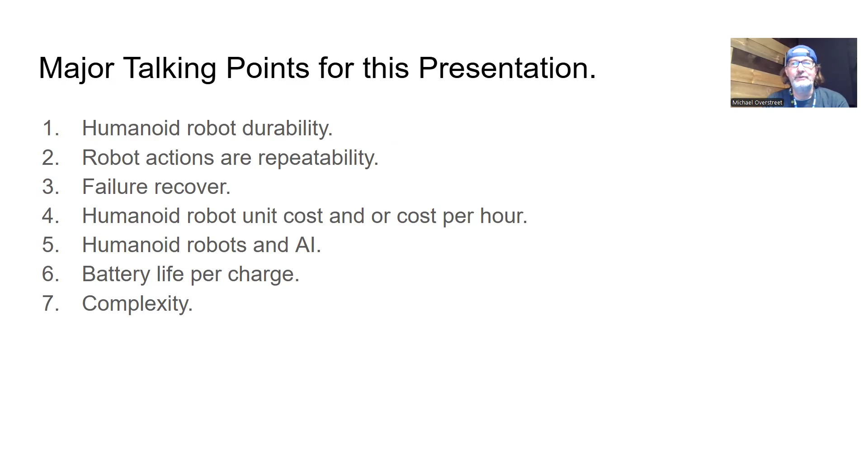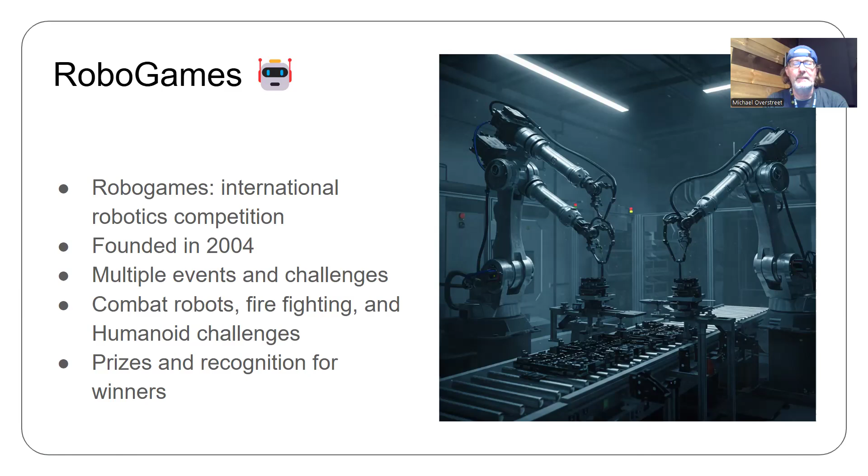So RoboGames is where I got started, like I said. I think my first competition was 2005 - I don't think I was there the first year - but it was a robot competition in the Bay Area. People from all over the world were there.

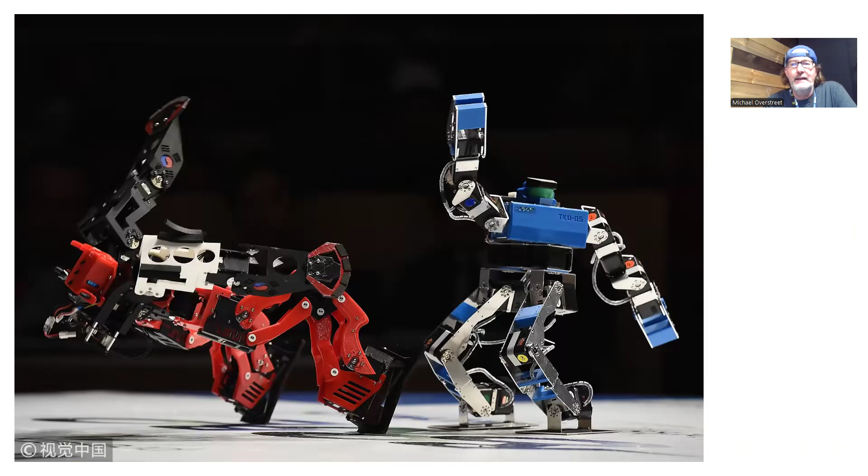So when people think about RoboGames, they usually think about BattleBots, the big BattleBot arena - oh yeah, yeah, and of course they've got BattleBots in Vegas and so on. So when people think about robot competitions, this is what they usually think about. Now, this is what I think about - this is a kung fu match between two humanoid robots. This is what I enjoy, this is what I think is very cool. This is what I did in RoboGames for all those years since 2005.

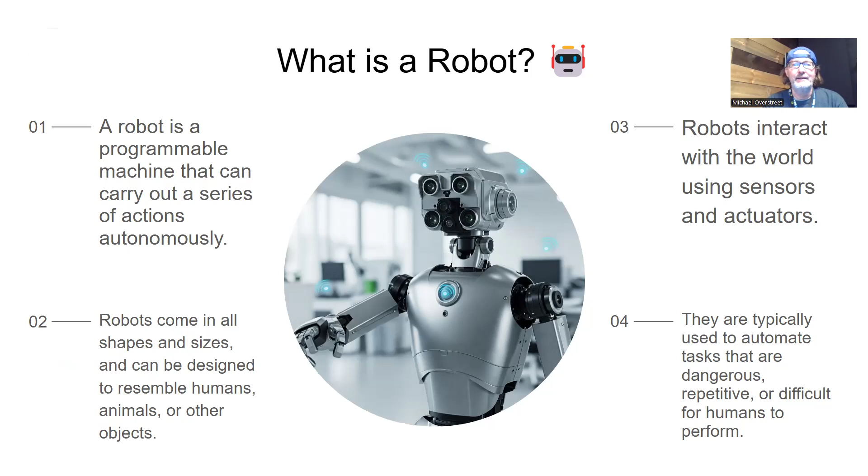Some of these slides are generic and AI created, but a robot is basically almost anything that is autonomous that you can program. Almost anything in the world now is a robot because almost everything we use nowadays has some kind of computer brain in it, and we tell it to do something, and then we expect it to do it. So the concept of what a robot is, is very generic. It can almost be anything.

Humanoid robots are trying to mimic us, and this has been going on for hundreds, if not thousands, of years. I think the Chinese had robots and the Japanese had tea robots that would serve tea to people. They had gears and pulleys made out of wood that would move the robot around and perform a pre-programmed action. But the big thing is they're trying to mimic us.

So when I tell this story, a lot of people don't quite get it. But when I was a young kid, I watched a rerun of Forbidden Planet. In Forbidden Planet, you never see the aliens, you only see their instruments, their doorways, the buildings they made for themselves underground. The cool thing about it is it lets your imagination go wild. You saw that kind of not a rectangular doorway like our doorways - kind of a triangle, squatted triangle, square, not even a square doorway.

The reason why that was so fascinating to me is because the reason I'm so interested in humanoid robots is because our environment is set up for us - two legs, two arms, our general shape. Humanoid robots give you the capacity or capability to not change our environment to suit the robots.

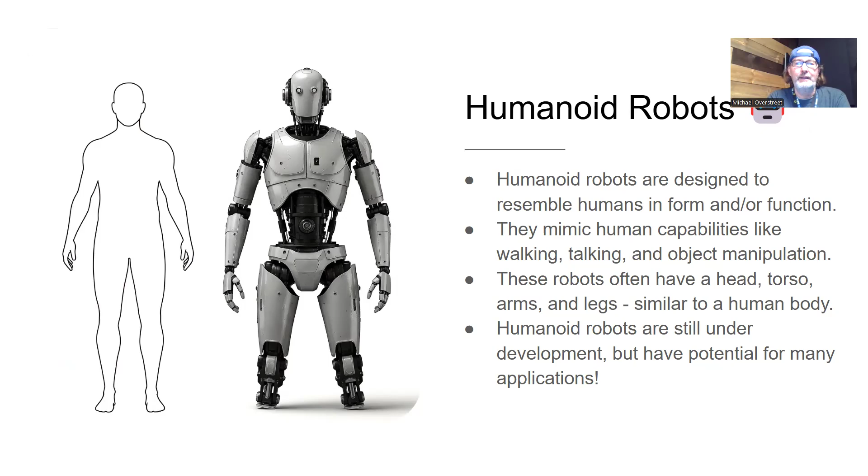That's all this slide's about, really.

One of the interesting things I always had conversations about at RoboGames was: why a humanoid robot? A lot of people have a really valid argument that function creates your form. Humanoid robots is basically form over function - not a humanoid is not perfect for all stuff. We have horses and other animals that we use on the farm and other places to help us do stuff, and their form works better there. But we also design the environment around them, or the tools around them, for use. So that interesting debate I always have with people usually goes: is form more important than function, or does function end up creating the form, the ideal perfect form?

I still don't think that debate is over, and I don't think it ever will be. I don't think a humanoid robot is the end all be all, but I'm also a big proponent and a big advocate of humanoid robots.

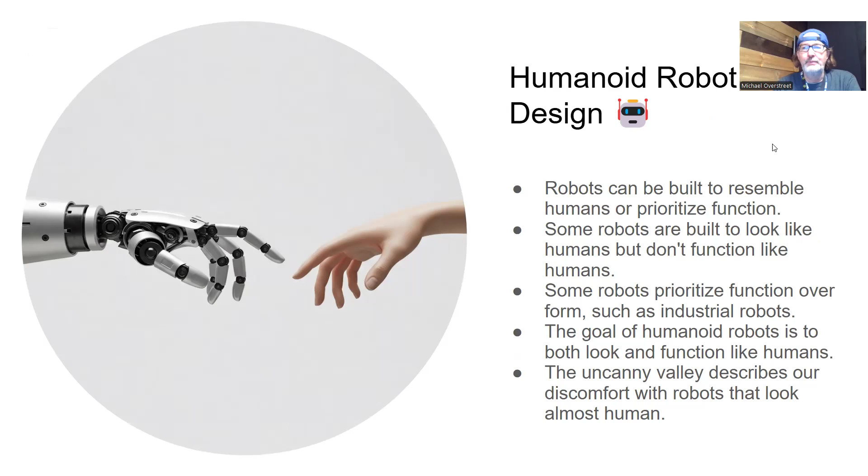And should they look just like us? I don't know. Maybe in some situations they should look just like us. In other situations, maybe they should look like a really powerful gorilla, or a really boxy robot. I'm not really set on the form like some people are.

It doesn't have to be a humanoid robot. You can be flexible in your design approach.

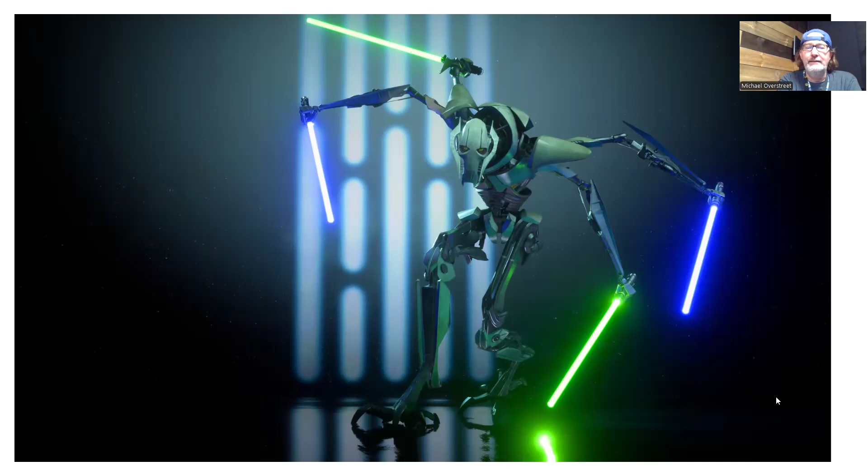Now, I love this picture. A lot of people may know who this is, but I don't think you need to be stuck on two arms and two hands. There's a lot of advantages to having three arms and three hands, or even four arms and four hands. Don't get stuck on it having to be exactly like us. Maybe we can find a middle ground from that form over function or function over form debate. This is all this picture is about.

I've seen robot arms that you can attach to yourself that could hold things for you - more powerful than your arms, helping you hold and carry things. You can attach them to your waist or shoulders and use them to pick up heavy weights, kind of like an exosuit or exoskeleton. We don't have to get into exosuits and exoskeletons in this talk, but I think they're a very viable way to make us - not like robots - but able to do a lot of the functions that a robot can do.

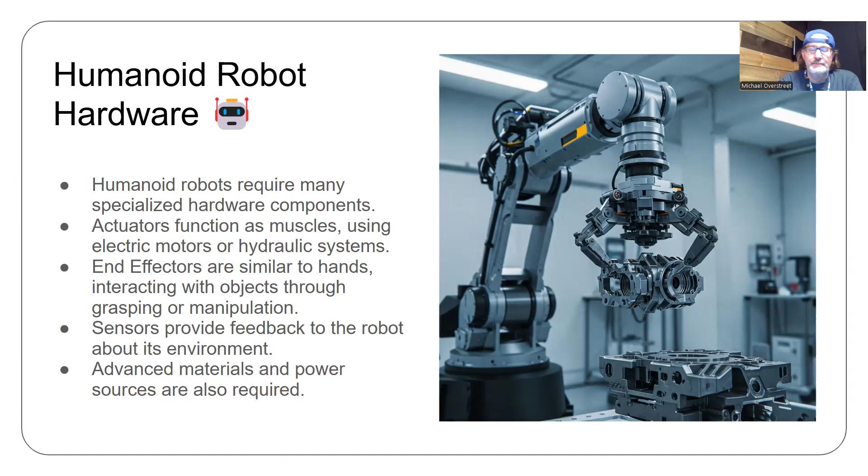Let me tell a story - this is kind of a myth, a legend, now that I've talked about actuators and servos. This is the legend of hobby robots that I've learned over the years. Back in the early 2000s, 2001-2002, in Japan, there was a Honda robot called Asimo - a very expensive, high-end robot, hard to manufacture and build.

There were hobbyists in Japan - of course the culture leans toward liking robots a lot better than American culture, which was brought up on Terminators. In Japan, a lot of robots are heroes. So some hobbyists were like, I want to build an Asimo.

Coincidentally, around the same time, Kondo, a servo actuator company in Japan that made RC hobby servos, came out with really high-end, expensive, high-torque, steel-geared servos. People saw that and started buying 15 or 20 of these to try to build their own humanoid robots. Kondo was shocked and surprised - they thought hobbyists would buy one to use on a helicopter or airplane, to move the ailerons, blades, and other parts on an airplane.

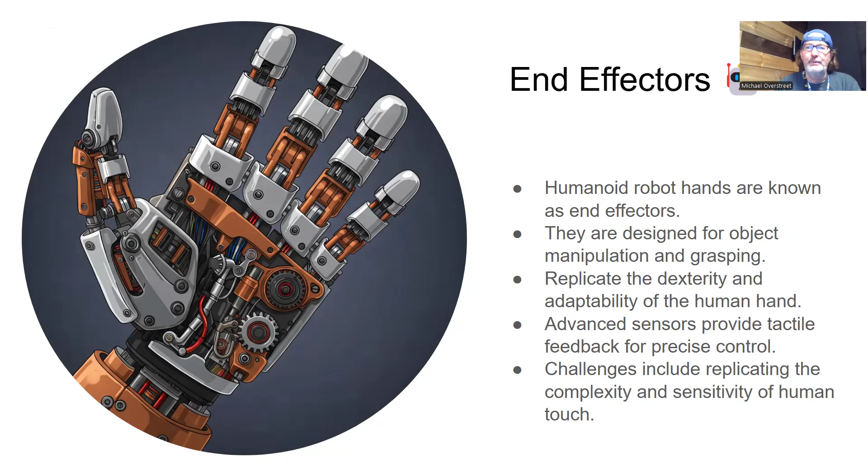When I talk about humanoid robots, I always like adding 3D printing because I'm known for that in the past, using some of the early DIY 3D printers to create robot parts, and I still do that today. It's a quick, fast and easy way to create something from your imagination, get it working and using it, so you can quickly iterate. I'm a big fan of iteration: design something, use it, figure out what's wrong with it, quickly iterate, create a new one. 3D printing is a great way for this iteration. May not be the greatest for mass production, but for innovation and creative iteration, I think it's awesome.

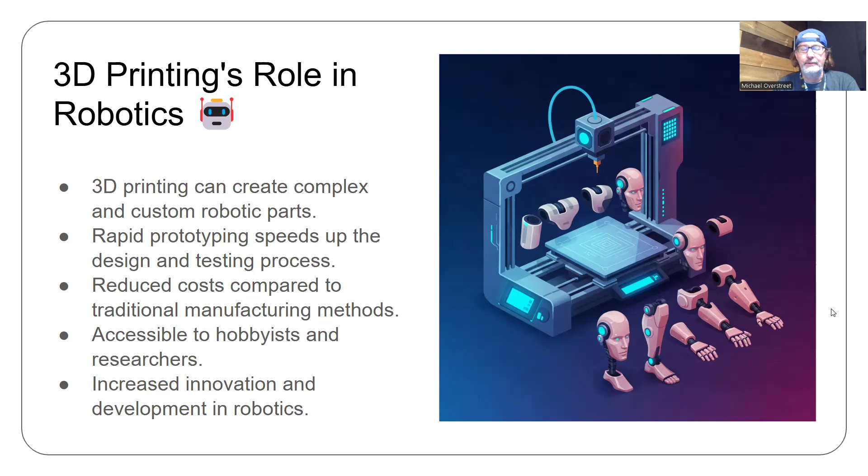With DIY 3D printers - well, not even really DIY anymore - the Cupcake's been around since like 2009, 2010. When I first used a Cupcake it was pretty much useless. Now most 3D printers are really, really good. You hardly have to do anything, you just print the thing out and you're done.

So this is one of the things I want to highlight. Right now, I don't think the battery technology is there. Most of the information I'm hearing is about 6 hours for a human-sized humanoid robot on a battery charge. And usually what happens is you get near the end of the battery charge and things start not working quite right - your sensors don't work quite right, they're not going to have power, it doesn't have enough lifting power and so on.

So I still think there's a lot of work needed here, especially if you're thinking a humanoid robot is going to replace a human, because most humans can work 6, 7, 8 hours a day easily, or that's kind of conditioned for us to work there. If you want a humanoid robot to do double and triple shifts, work 24/7, how are you going to do that with existing battery technology? I don't have a solution to it. I'm just saying that's something that needs to be thought about, because not only does it have to have enough battery life...

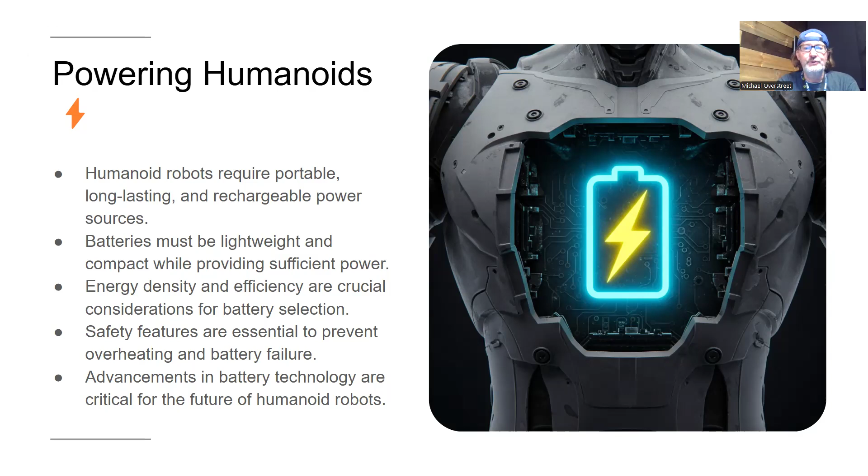...enough kilowatt hours, it can't be too heavy. If you've got a heavy battery and your whole chassis is designed just to carry that battery around, how can it effectively carry anything else? You overtax the servos and actuators because you have a huge battery, because you want an 18, 20 hour battery life, and that huge battery takes up all the space inside the humanoid robot.

Okay, so this is a huge topic - I probably could talk about it for hours. But the reason why I think robots and humanoid robots are becoming talked about more and more is the capability to train the AI in the humanoid robot to do tasks that are beneficial, that are worth paying money for. This area is so complex and changes so much on a daily basis. I still think we're years out before this is going to be, not even a solved problem, but just a partially solved problem. And AGI, artificial general intelligence - I don't know if we need that to make humanoid robots effective.

But there's a lot of work. To train a robot nowadays through videos or teleoperation, you've got to basically train it on one task at a time. And there are millions of tasks that we do every day that we don't have to be trained on one at a time. We can learn parts of a task and then use our brains to put all these little subtasks together to complete a major task.

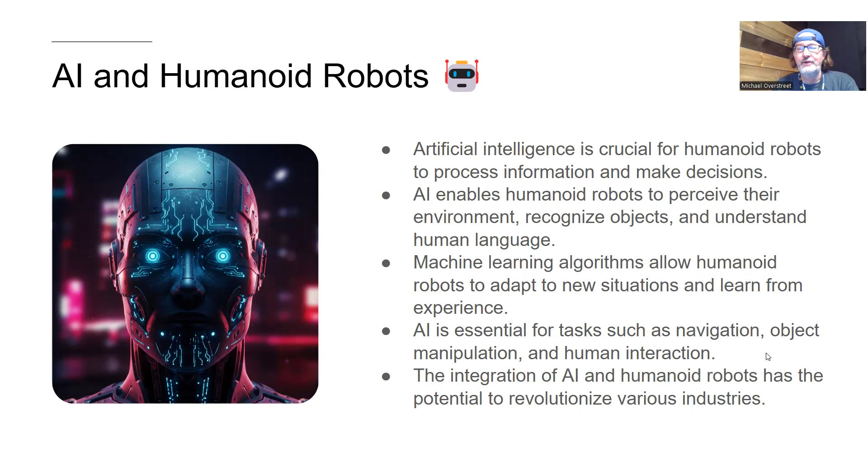Token creation, token generation - I just don't think that's... I mean, it's a way to learn and it's a way to create AI, but it's not really how we think, work, function, combine tasks together, and so on. It's a very complicated, very complex topic. I could probably spend hours talking about this topic.

But yeah, this is more reinforcement of AI algorithms, AI learning, machine learning, reinforcement learning, supervised, unsupervised, deep learning - all these complex things that are AI. And again, I reiterate, I've seen AI hallucinate.

I don't want an AI to hallucinate when it's picking up my cat. I don't want an AI to hallucinate when it's picking up somebody's baby or somebody's kid and accidentally hurt the pet or the baby or the kid or something. So we still have to solve a lot of these problems.

This is a term I've been hearing a lot lately, which is basically physical AI - the concept, as I understand it, is AI can only become artificial general intelligence if it has a body or form to move around and interact with its environment. Kind of like us - we become smarter as we move around and interact with our environment. We talk to our environment, we pick things up, we move in, learn, and so on.

As far as I know, AI is basically trained on data. You don't basically have a robot walking around learning stuff. You use teleoperation, you use lots of videos, and then you try to train the AI, which then after you train the AI can manipulate the robot to do what it's supposed to do based on what is seen in the video or the motions it's captured by teleoperation of the robot.

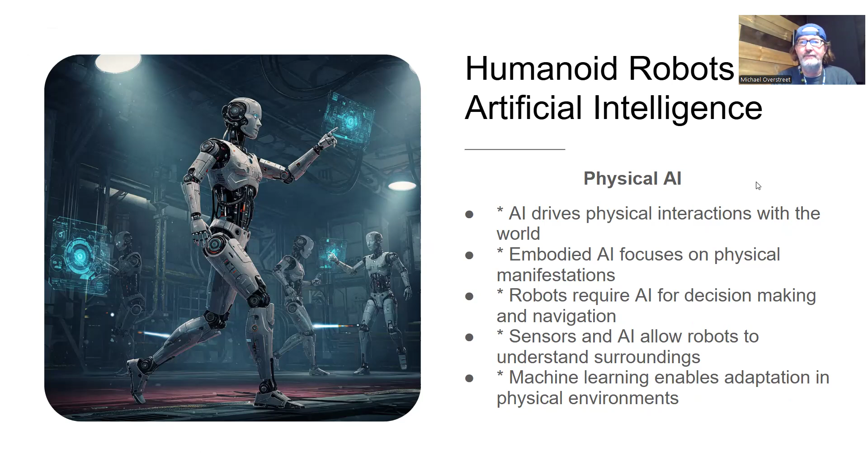Okay, again, I'm not an expert. I'm just bringing up interesting things that I've heard about or seen or have talked about.

So this is not investment advice. I'm just saying there are so many companies right now working on humanoid robots, which to me is awesome because when I first started at RoboGames back in 2005, everybody thought humanoid robots were a stupid idea. Now everybody's talking about humanoid robots.

The big thing is, I think everybody needs to remember that without all the work done by Boston Dynamics on their Atlas and Spot robots, and Honda's millions and millions of dollars spent on Asimo, these robot companies today would not be as far as they are in a generalized multi-purpose humanoid robot.

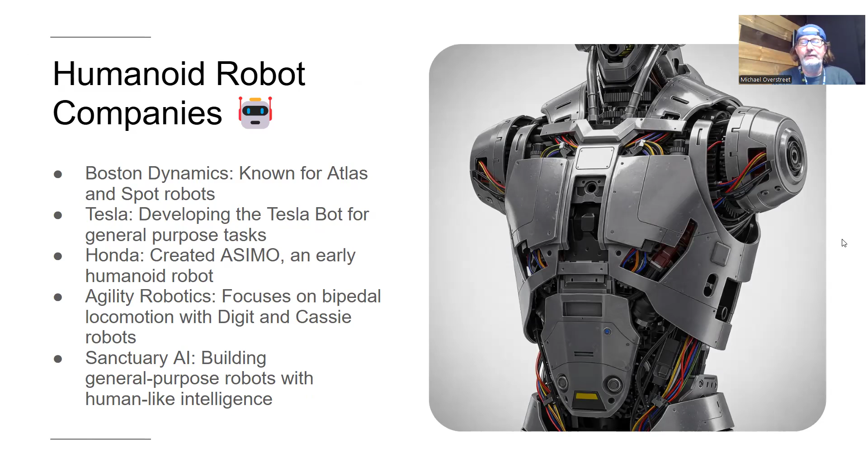So many companies, okay, I've lost track now. So like I said, this is not investment advice. If you want to know what the companies are, just ask AI. AI would actually be glad to tell you all the companies it knows of.

So I put this slide in. I'm not a business person, I'm not an accountant. I can't tell you how many times I've been in a meeting. I was a software development engineer for a long time. I can't tell you how many meetings I was in where the accountant, the business side, was promising the world to our clients, giving our software functionality it didn't have, capabilities it didn't have, overly optimistic about timelines.

So basically, what TAM is, total addressable market. So if you think into the future, like futurists love to do, you try to come up with ideas that are probably going to be wrong about what you think the future is going to be like in 10, 15, 20 years. Sometimes even 5 years, it's hard to say what's going to happen.

So basically, they were constantly talking about humanoid robots being one for one - for every human in the world, there'll be at least one humanoid robot. That's where they get into this TAM.

But the problem with TAM is that if it's not based in some kind of reality as far as cost, or cost per hour, or do we have these capabilities now? When would we get these capabilities? Does anybody really want a humanoid robot? Can AI solve everything? Can AI just come in and solve all the problems of complexity and the errors that occur when you try to use a humanoid robot with humans?

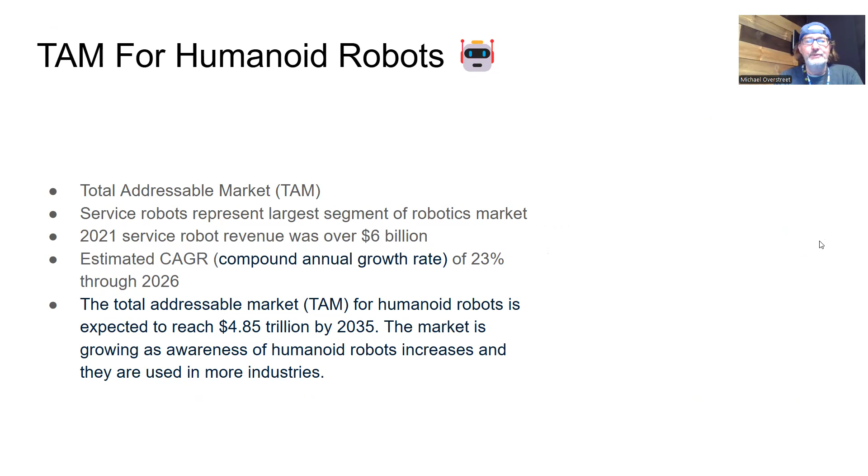I'm just bringing this up because I'm being pounded by TAM, TAM, TAM, TAM, TAM. Yes, TAM's great, projecting's great, but let's be realistic. Let's not promise our clients stuff that we can't deliver now at the development cost that we have. A lot of companies are going to go bankrupt because they're promising the world to their clients, and they don't have the money or the time to deliver that. And once again, cost.

This $20,000 or less cost to build a humanoid robot, I don't know where that came from, I don't know who came up with that. It just seems like somebody says, 'Oh, I think we can build a humanoid robot for $20,000.' No offense, Mr. Musk, but that's a projection. And then people took that $20,000 and just went nuts and said, 'Oh yeah, we can get that to 10,000. If we make millions and billions of these, then we can get it down to 10,000 per robot to build.' I just don't see that yet. Maybe in the future.

There are so many components to a humanoid robot: actuators, pulleys, the computers, the AI, the hardware, everything is rolled in. The complexity level of a humanoid robot, the sensors you need - vision sensors, tactile sensors, pressure sensors, all that kind of stuff. And you've got to integrate them all into one package, and it's got to work 100% of the time.

Let's chill on this $10,000 or $20,000 cost to build. I'm an engineer, I know what it costs to build stuff. It's just going to take time. Maybe manufacturing and making millions and getting the cost for COGS down will get us there, but come on.

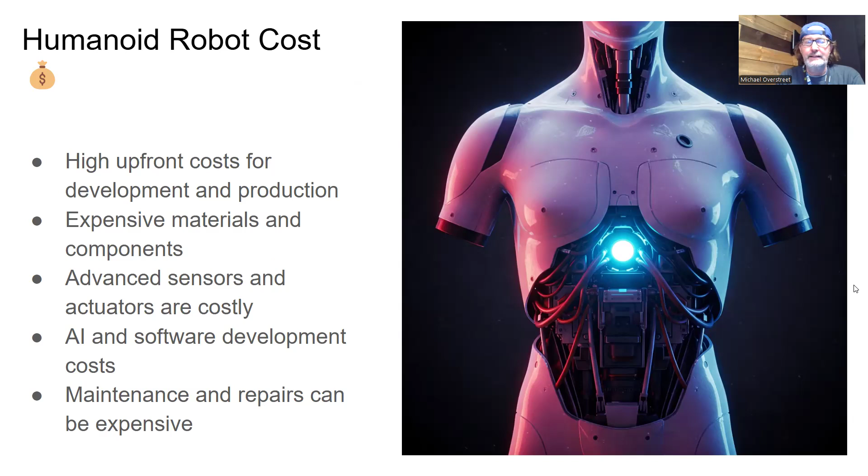So here's kind of a breakdown. I've got the link to this report on humanoid robots that you can look at. If you start breaking everything down - the multiple servos, you're talking 20 plus, 20, 30 actuators, servos, battery packs, wiring, the infrastructure - are you going to need steel or titanium or aluminum structures, the torque and all that kind of stuff to handle the torque, and the wiring. And not only do you have each component cost, you have to put it together.

I think their cost was around $60,000. I still don't see that.

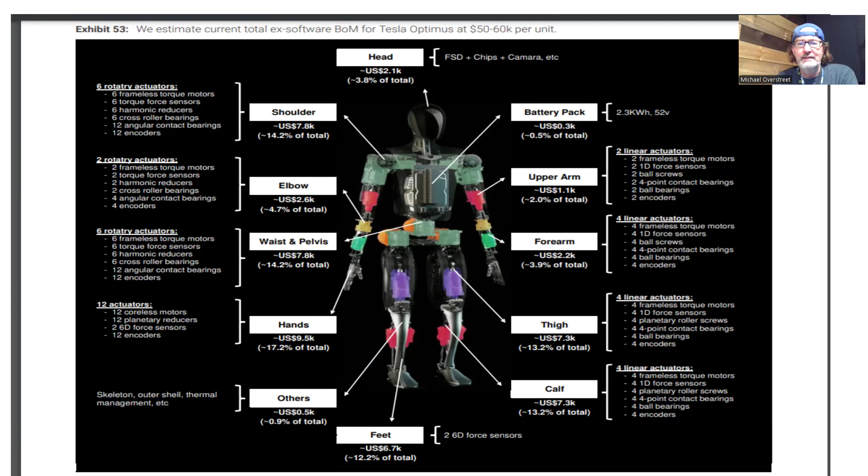How is that possible? Maybe in the future, but $60,000 for a humanoid robot with this complexity level—the software, the integration, the building, the hours. This might be out of date, and like I said, this is not investment advice. Don't pick robots based on the slide.

Of course you've got Boston Dynamics, they've been in this business for over 30 years. You've got Tesla, the new startup, the new challenger to the throne. Figure AI—good at raising money, good at building robots. I don't know, somebody else can make that determination.

Agility with their Digit robot—they actually have a factory where they say they mass produce robots in the hundreds that they've built. It'd be cool to see their factory. I think they work with Amazon.

Of course, Tesla has an advantage because they don't have to actually sell their robots. They can build their robot and put it in their factories in the hundreds and thousands, and within a few years they can iterate and produce a fully automated factory that doesn't need a human.

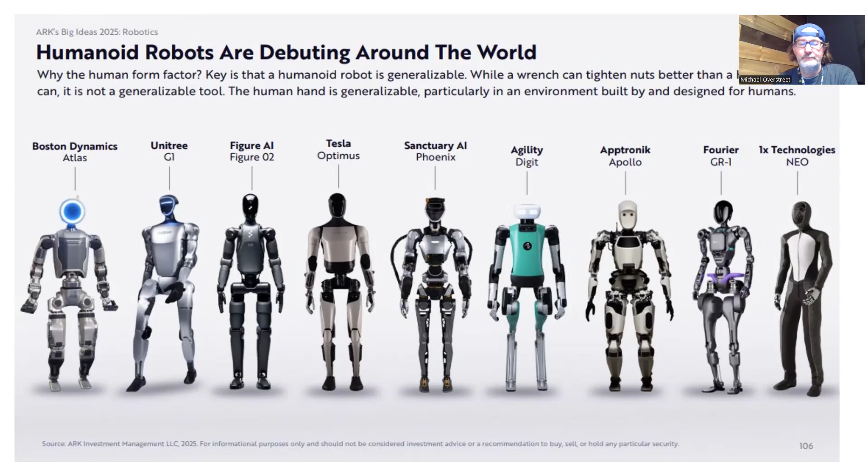This is where I think humanoid robots will start out originally, initially—in factories. The reason why is because you can put a big cage around the assembly line and protect humans and the environment from the robots until you get them more tested and more developed.

I'm still kind of stuck on that 24/7, seven days a week durability—I just don't think it's there. Battery life is not there. You've got to swap batteries or charge batteries. You'll have to have multiple robots to do a job. If you're going to have a robot 24/7, you're going to need two or three robots to fill one position, because you're going to be constantly charging batteries or doing maintenance.

How many maintenance hours? People criticize the Air Force all the time about how many hours they need to maintain their stealth airplanes to stay flying in stealth mode. For every hour it flies, they need at least 10 hours or more to keep it in proper shape and proper working order.

So I don't know. It's going to be interesting to see the cost per hour. Is a humanoid robot really going to be cheaper than a human? Maybe, maybe in the future sometime.

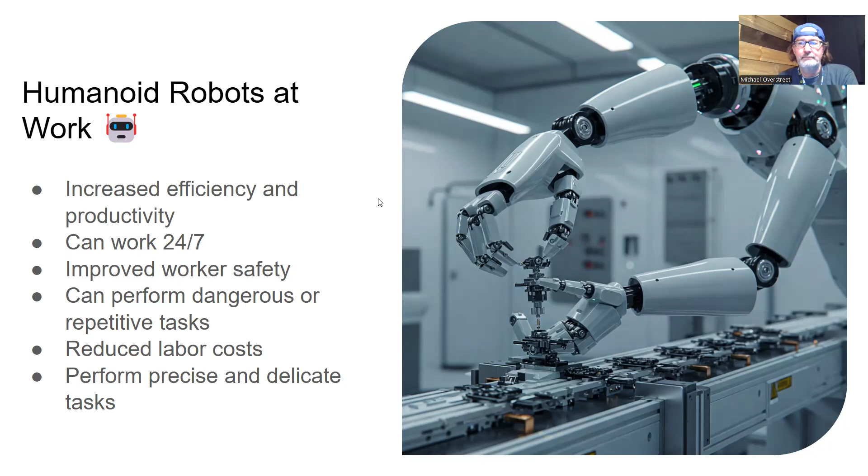Humanoid robots in the home, I think I talked about this a little bit already. I think the biggest thing we need to worry about is that the state of artificial intelligence right now is good, but do you really want an LLM based AI dealing with your kids, dealing with your pets, walking around your house? There's going to be a lot of safety issues happening because of this. So I just want everybody to think a little bit about, is this a safe environment? Is being in the home a safe environment? This could be years out.

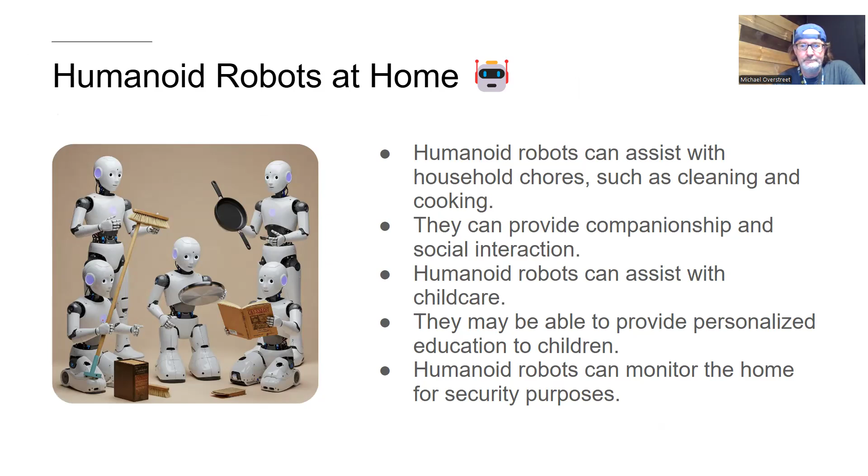Lots of companies are involved in humanoid robots. The side companies, actuators, everything that comes, the complexity level of humanoid robot, every element in the humanoid robot is going to need a huge supply chain. Some of it is in place, but to create millions and millions of humanoid robots every year, you're going to have to develop the supply chain for that. So I just warn people, don't say it's going to happen next week when you've got to build up the supply chain.

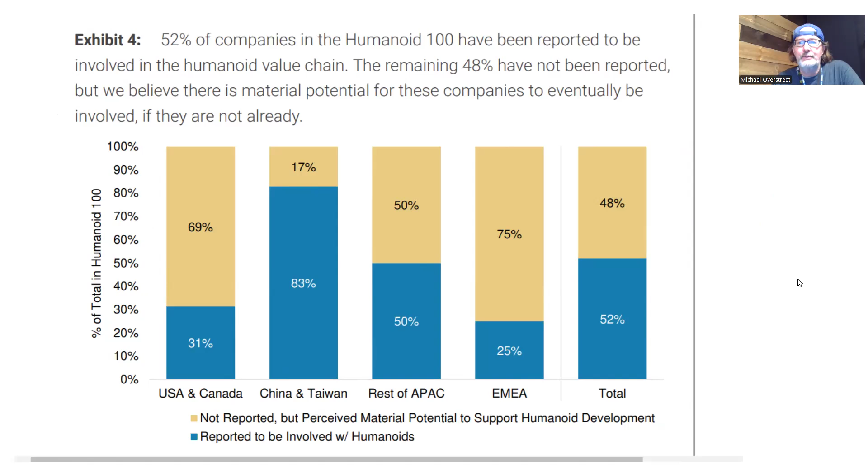Yeah, this is just showing all the different companies. China is really, really going all out on robots and humanoid robots. And I think it's just going to expand more and more in the future. This is a link to that Morgan Stanley report that I read. It was very interesting. I'm not a business person, so it was interesting to read. I think it was very optimistic, but it was very interesting to read. So you can check it out.

Give me some feedback. What do you think about Morgan Stanley and their $60,000 humanoid robot cost to build.

I think the future is bright. I think there's a lot of things that are going to be happening in humanoid robots. It's probably going to, as AI gets better and better, as we solve a lot of the AI issues, training issues, hallucination issues, all that kind of stuff, AI is going to make applications for humanoid robots easier to do. It'll unlock the potential of what a humanoid, a general purpose, jack of all trades humanoid robot could do. And of course, the TAM's really high. And I think there's 3D printing involved and so on. But I think we're not quite there.

We've got a lot of iteration, lots of iteration needs to be done. Lots of robots need to be out there actually performing worthwhile tasks. And so we can expand and improve and develop further.

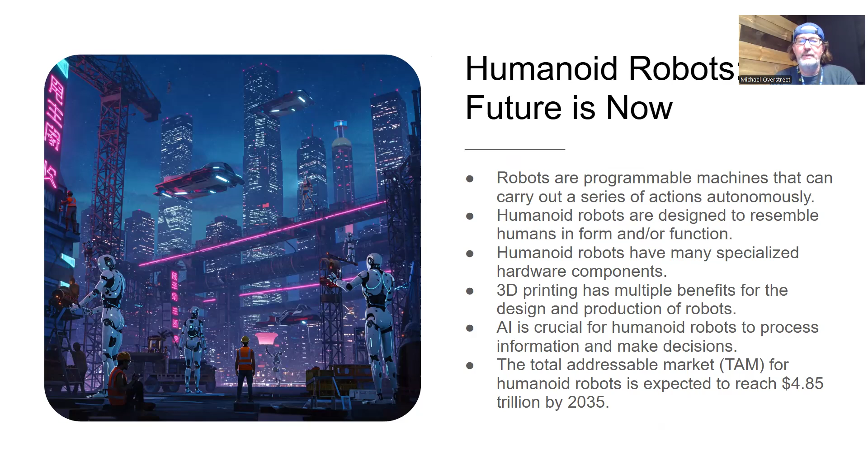So finally, kind of wrap this up because I don't want to bore everybody. My favorite topics are robotics and STEM and so on. I do a lot of robotics education, work with the FIRST teams. I think encouraging kids to look into STEM careers is important. I think those careers are still going to be extremely important, extremely valuable, and high demand, especially in the U.S.

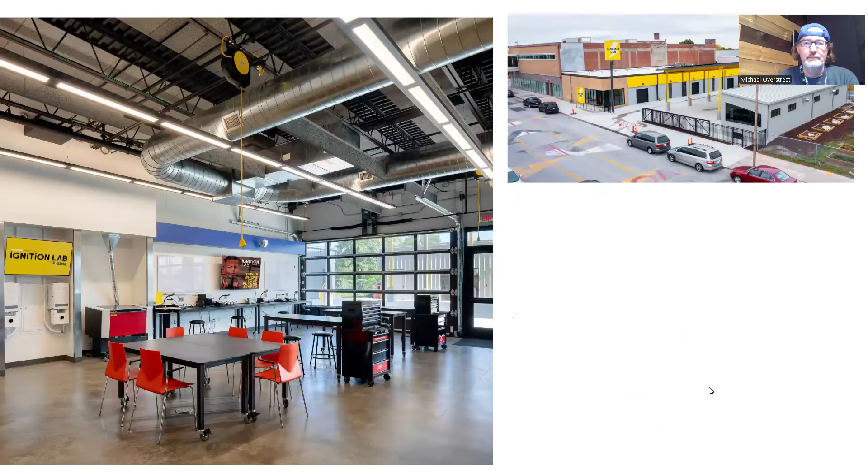This is quickly where I work, Ignition Lab in Kansas City, Missouri. We do robotics education, STEAM and STEM education. Another view, picture, so on.

So I'll kind of wrap it up really fast. I think I've talked about my 7 or so valid points. Humanoid robots have huge potential. I'm happy that everybody else has kind of come around. In 2005, everybody was laughing at me as a proponent, an advocate for humanoid robots. It's really nice to see that other people are coming around to this and it's becoming an extremely important and possible future, because originally back in 2005, I never thought I would see this development and potential. I mean, there's a possibility we might have humanoid robots walking around on Mars in the next 6 years. At least that's the promise. Walking around Mars, walking around the moon, doing stuff semi-remotely, semi-teleoperated, using AI to do stuff that, especially in environments like Mars and the moon, where it's kind of hazardous for us to do all this heavy work.